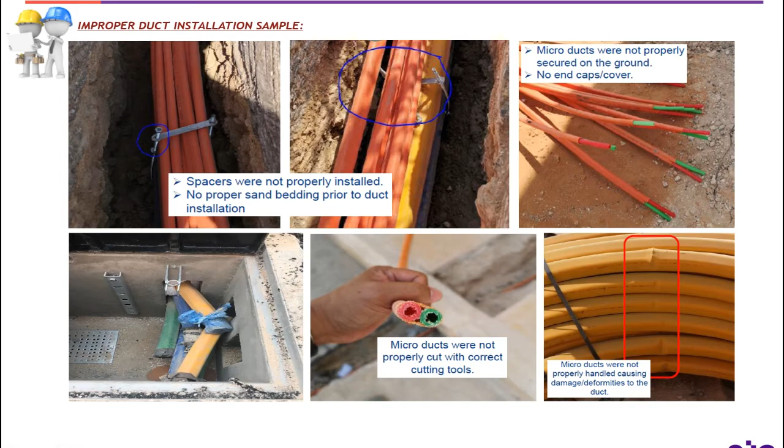So another sample of pictures of improper installation in the field. As you notice, the manhole is not aligned to the trench. Duct spacers were also not properly installed, as you can see in the picture. As per STC standard, duct spacers must be installed 1.5 meters apart.

Plywood was used also to cover the knockout windows instead of grout. The trench is also beyond STC specs, causing the contractor to spend more time on concrete backfilling. There's no sand bedding also, which will pose danger to the ducts and might get punctured later on.

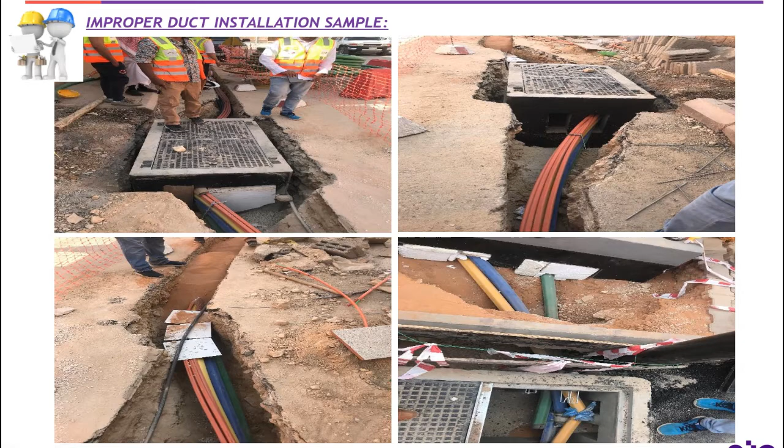Let's move on to backpull or stationary reel method. So when do we need to use this method, guys? Use it on routes where space is limited for heavy equipment. It can also be used in road crossings, trenches with obstacles, and in long distance routes where the soil is not excessively rocky.

Figure 30 is just to show you a stationary reel and where it has to be used. In some cases, ducts can also be pulled by a pickup truck, tractor, backhoe, or similar, taking great care during pulling. Avoid excessive tension and force all the time during pulling.

Polyethylene corrugated duct can be pulled directly into a 40 centimeter wide trench, as shown in figure 31. However, if the trench is 20 centimeters wide, the duct should be deployed alongside the trench and lowered into the trench manually, as shown in figure 32.

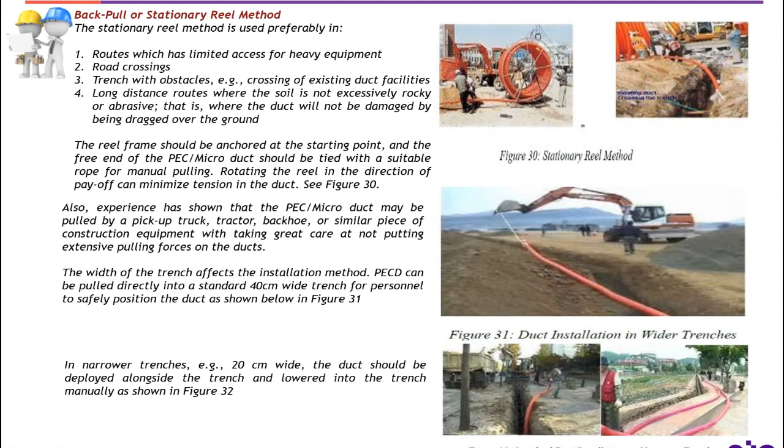So drive off or moving reel method. What do you know about this method, guys? Drive off method is used on routes that can be traversed by reel carrying vehicles. It could also be used outside the cities, in areas with abrasive soil or rocky pavement. As much as possible, the vehicle should be positioned near the open trench to allow easy laying of duct directly to the trench, as shown in figure 33, which shows how a moving reel must be positioned along the trench.

Let's talk about mole plowing method. Who among you guys have tried or experienced this mole plowing method? As you know, this method is very common in long distance networks. This method could only be applied if the pavement is sandy or soft. Otherwise, if it is not, then use another trenching method.

Prior to mole plowing, you guys need to perform proper and correct precautionary measures like ground scanning, test pit if necessary, and coordination with other utilities, municipality, and other agencies involved. By doing this, it might save you from any damages to existing underground utilities during execution. This plowing method can also install multiple ducts, including warning tapes and earthing as required, and close the plowing furrow simultaneously. Is it clear?

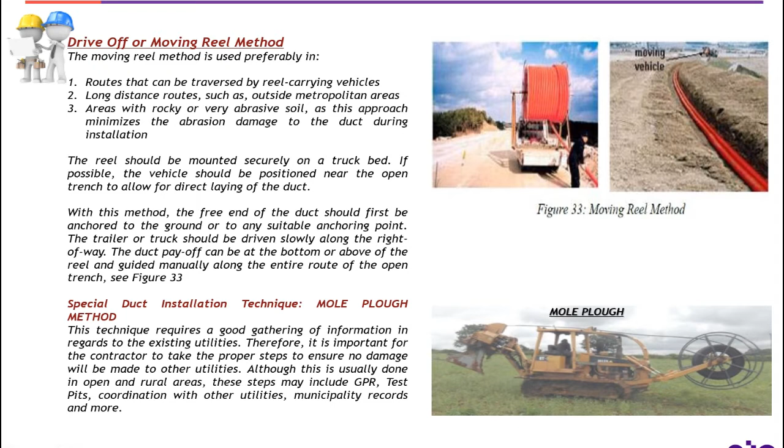So this is the plowing machine on the right side with its itemized parts like the drum mounting, drum brake, guide roller, lifting mechanism, and many more.

The plowing method can be divided into the following working steps. Number one, concerning external lines and soil quality, selection of plowing units and drilling tools, removing of bushes, fences, and hindrances. So you also have reconnaissance of the plow path course, laying out of ducts or installation directly from the transport vehicle. We also have plowing, reconstructing the surfaces, and preparing a scale accurate drawing of the plowing course.

So the mole plow has features to produce vibration on the plow share in vertical direction. This loosens the soil and cuts a clean, narrow duct-laying trench through it. Due to the vibration during digging, fine sand falls to the bottom of the trench and all large debris moves onto the surface, such that the duct is always protected by sand.

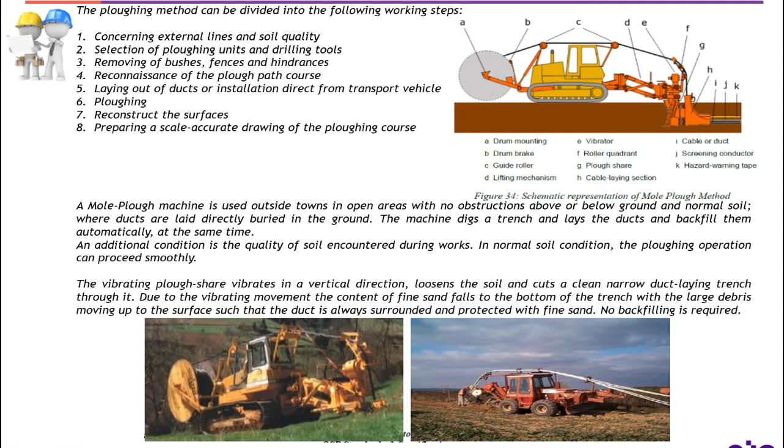Okay, so we move on to the installation of multi-way up to 8-way 110 mm ducts. We also have installation of over 8-way 110 mm ducts, and we will also discuss the installation between mini manhole and handhole, including road crossing.

Installation of multi-way up to 8-way 110 mm ducts and installation of over 8-way 110 mm ducts both don't require concrete encasement. However, as an alternative to using duct spacers, 12 mm steel bars are used, driven into the ground at 1.5 to 2.0 meter intervals along the trench to keep the ducts in correct formation. On completion of the duct nest, 6 mm steel bars should be placed horizontally across the uppermost layer of ducts and tied at 75 meter intervals to the vertical bars.

Okay, so duct installation between mini manholes, including crossings. Shown below is a typical trench route in the secondary network. The stationary method is the preferred method because of the existence of existing utility ducts along the trench, including road crossing, as you can see in the picture in figure 38.

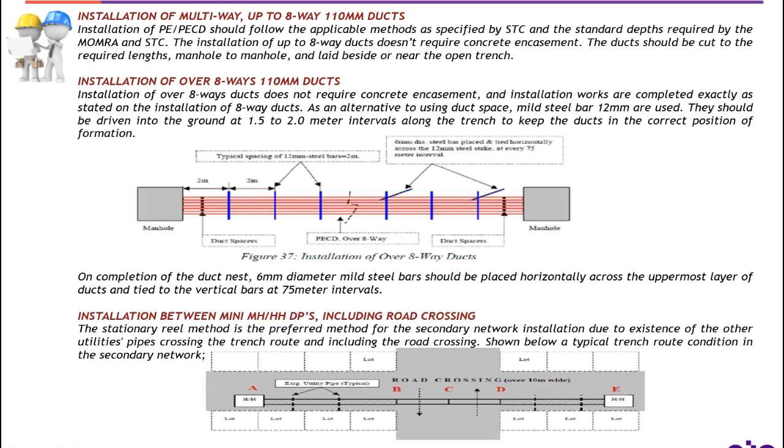This slide will guide you how to install ducts step by step when crossing streets or road crossing. Step one: let's say you want to excavate from point A to E. But before you can complete the trench, there are procedures you need to do. So excavate from point A to point B, shown on the right picture, and also B to C and D to E.

Leave point C to D open for traffic, as shown in figure 39. Use steel plates to provide temporary cover on all private driveways to avoid any inconvenience for the customer. So that's step one.

Step two: position the reel near point C, then pull the polyethylene corrugated duct from point C to A, as shown in figure 39.

Step three: cover the trench from point A to C and leave point B to C open for traffic. Then move the reel to point D, as shown in figure 40.

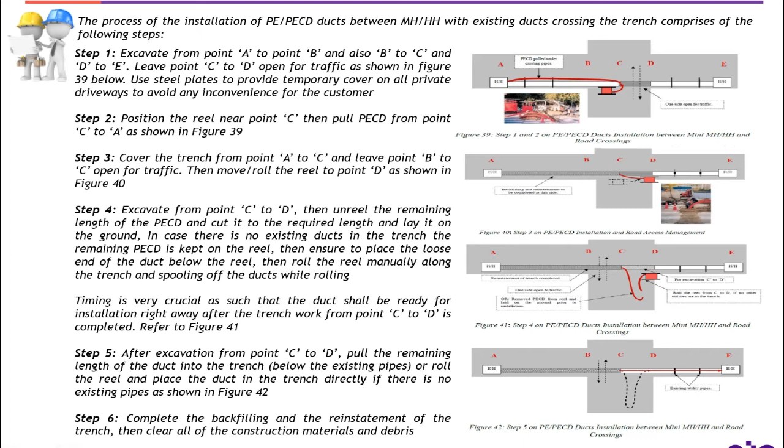Okay, so sealing of ducts. All empty ducts shall be sealed at all times, whether completely installed or not yet installed. This will prevent ducts from water entry, dirt, or foreign objects.

Microducts shall be sealed as well with the prescribed end caps approved by STC. Main ducts installed in mini manhole, handhole, or even in a cable vault or cable chamber should be sealed with foam. So if there is new installation, contractors should not be charging for extra services for the sealing of ducts or even installation of end caps, because these are already included in the new installation.

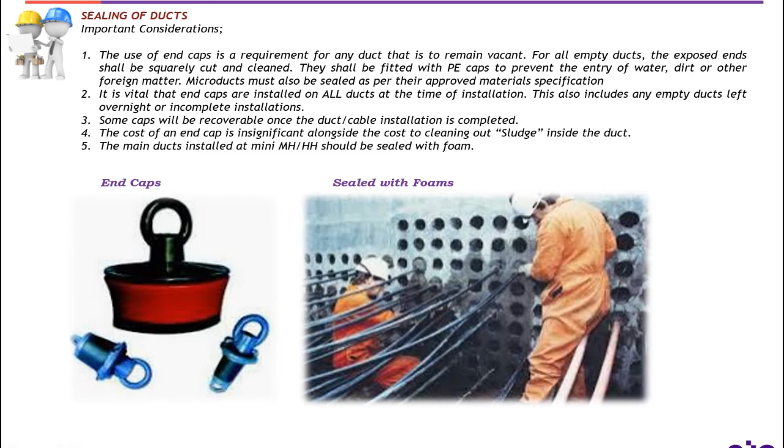Next topic is duct configuration and formation. This slide will tell us about the standard configuration of ducts in the feeder and distribution network.

Between central offices or exchanges towards the access sites, a 20-way by 32 mm duct with a configuration of 5 by 4 is being used, where 5 ducts are orange, another black with orange stripe, and 10 are black pipes, as shown in figure 43.

20-way by 32 mm and 12 bundles of 20 mm could also be fitted in one knockout window of a manhole or handhole, as shown in figure 44. With regards to the drop ducts, a 2 by 20/16 is used to the customer end from the nearest manhole or handhole.

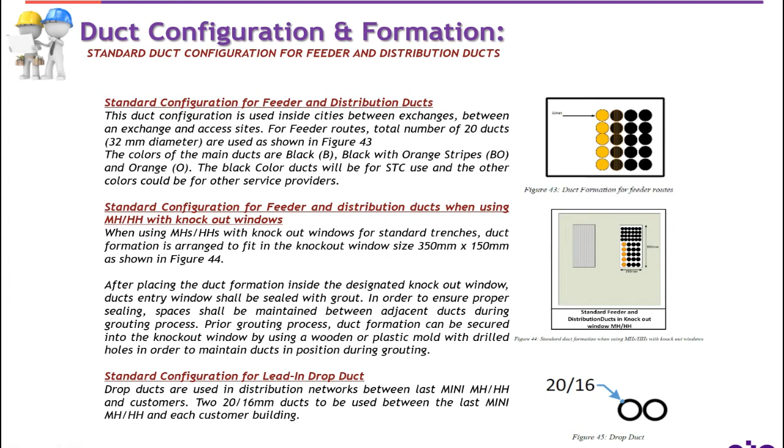In a long-distance network outside cities, towns, and villages, a 110 mm corrugated PE duct with a pre-installed 5 by 32 mm subduct has to be used, as shown in figure 46. Take note: do not receive any material from STC or vendor of this kind if there is no installed copper wire in the duct sheath, because this copper wire will serve as a detector to pinpoint the position of the duct underground later on.

Until this time, microducts in the long-distance network are not yet being implemented, until further notice.

However, in the feeder and distribution network, microducts are used, and most of the application is on the NBB projects. So 7 by 25mm HDPE microducts of 3 bundles is used in both feeder and distribution.

In table 7, you will find the duct color codes for the 7-way microducts, where yellow is duct number 1, blue is duct number 2, green is duct number 3, red is duct 4, gray is duct 5, white is duct 6, and orange is duct number 7.

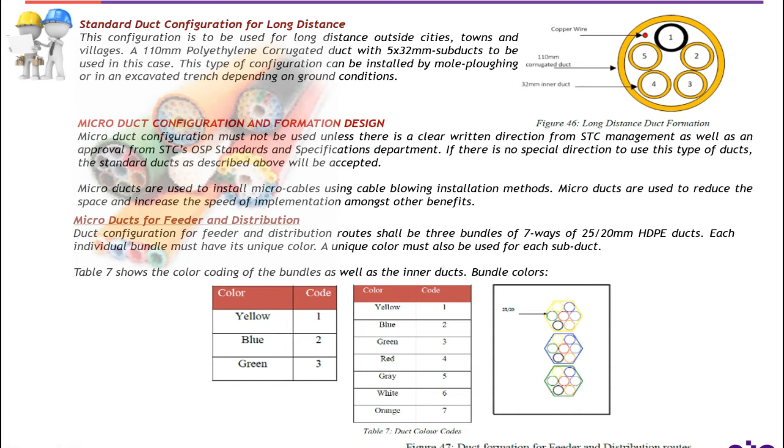So microducts for lead-in. For microdrop without sharing, that configuration would be 1 by 2 of 12/8 HDPE pipe to be installed in villas, buildings, or any other infrastructure from the nearest handhole or manhole.

Color codes in this configuration would be yellow-blue, where yellow is duct number 1 and blue is duct number 2. The only difference of drop ducts with sharing versus without sharing is the duct configuration, where drop ducts with sharing would be a 2 by 2 configuration: yellow is duct number 1, blue is duct number 2, green is duct number 3, and red is duct number 4, as shown in table 9 of this slide.

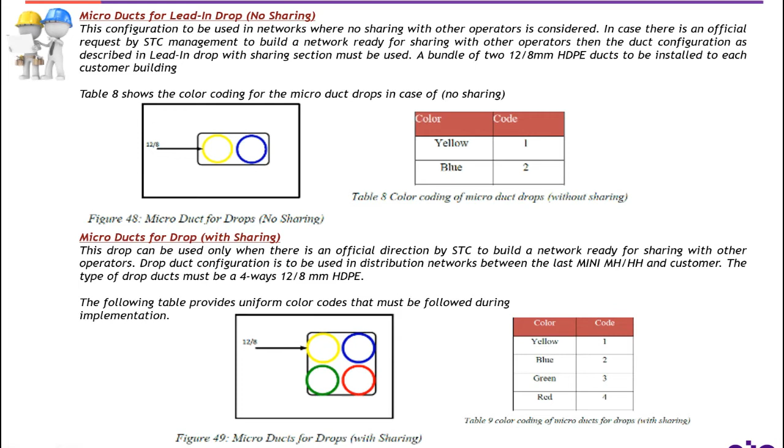In this slide, we're going to discuss the main duct configuration for copper, lead-in drop duct configuration for copper, microduct configuration for long-distance network, and duct bend requirements.

For main duct configuration for copper, this configuration is used between MSAN and copper cabinet, where a combination of 75mm HDPE pipe and 3 bundles of 7-way by 25mm microducts are to be used in a common trench.

For lead-in drop in copper, which is basically used from distribution point to the customer, a combination of 50mm HDPE and a 2-way by 12/8mm microducts are to be used.

So for the microduct in a long distance network outside cities, a 4-way by 25mm HDPE pipe with a metallic wire is to be used.

With regards to the duct bends, we have different situations in table 11, which will guide you regarding the bending requirements.

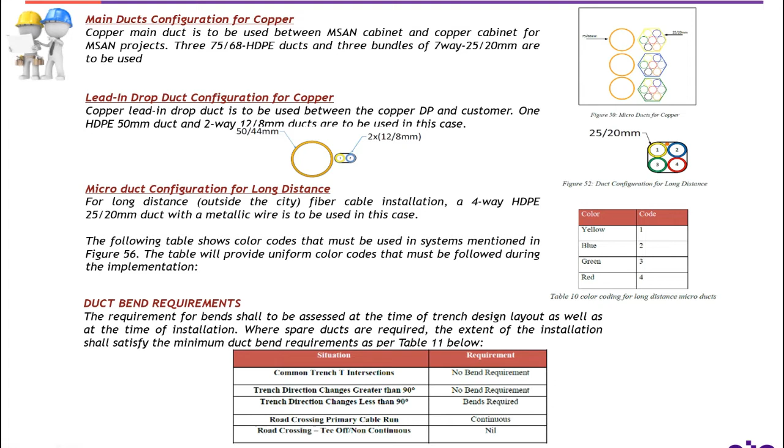Duct or cable location markers. It is very important that when you are implementing underground network in a long distance route, location markers must be in place or available to determine the exact position of the ducts or cables underground.

As per STC requirement, location marker must be installed in manholes, handholes in a long distance route, or rural areas.

If it is a direct buried cable, marker post must be installed every 400 meters. However, if cable is ducted, then you need to install marker post every 250 meters apart.

Also, if there is a change in cable route or direction, like road crossing, river crossing, wadi, and culvert, a marker post with two black stripes is also required.

If there is a splice closure, two marker posts with three red stripes shall be installed in both ends of the handhole, as shown in figure 53.

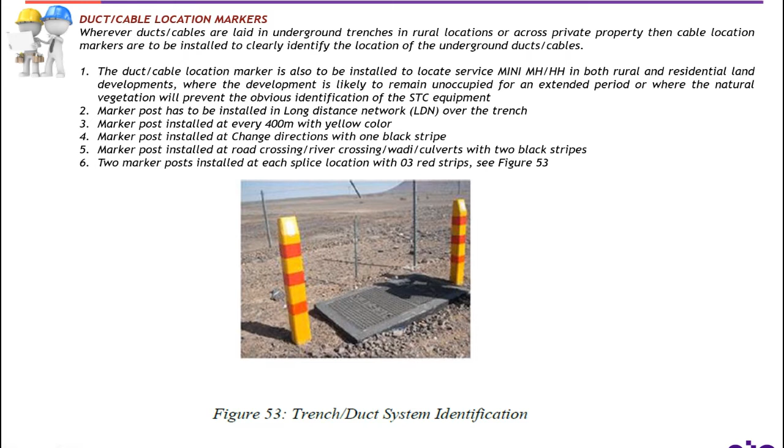So let's move on to the crossing requirements. In a long distance network, you often encounter these situations: crossing river, culverts, bridges, tunnels, or even railroad crossing.

For example, in wadi crossing, take note that during survey, the surveyor must identify clearly if the wadi is dry or just a culvert, or if the wadi is with water, wet, or if it even requires special protection. This is very important during survey because plant units that you are going to apply in these scenarios are totally different.

For dry wadi crossing, meaning that only a small amount of water flows during rainy season, plant units that you should apply will be 1200.025, which is for a supply of 1 by 110 PEC duct with 5 by 32 mm subduct on it, with a concrete encasement. Another PU is 1030.001, which is for extra excavation in soil. And finally, 1035.001, which is for the breaking and removal of rock if it is only required.

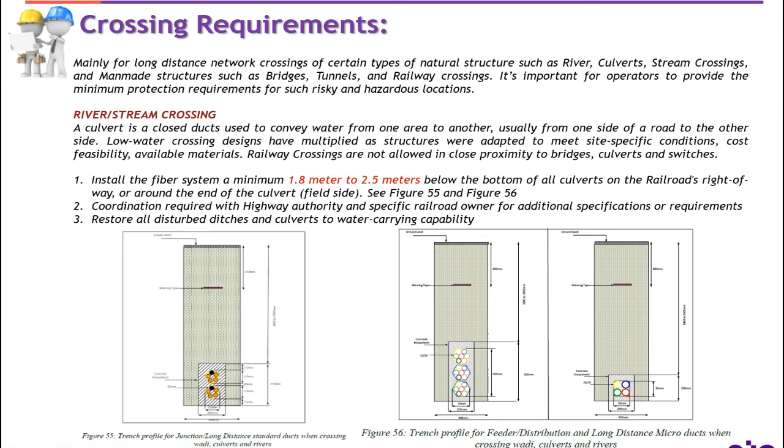So let's move on to bridge crossing. When crossing a bridge, make sure that before you install a new pipe, ensure that there are no more available ducts to use. Always use existing ducts as much as possible. If it is already saturated, then it's time to install a new one.

You guys need to coordinate with proper authorities and acquire the access permit before execution. With all the proper requirements prior to implementation, a 110 mm HDPE, PEC, or free duct shall be used. Where required, ducts shall be encased in concrete where they traverse the bridge supports and enter the ground. The most common method of installation in this case is by the use of a hydraulically operated crane fitted with a safety basket, so safety precautions shall always be observed during execution.

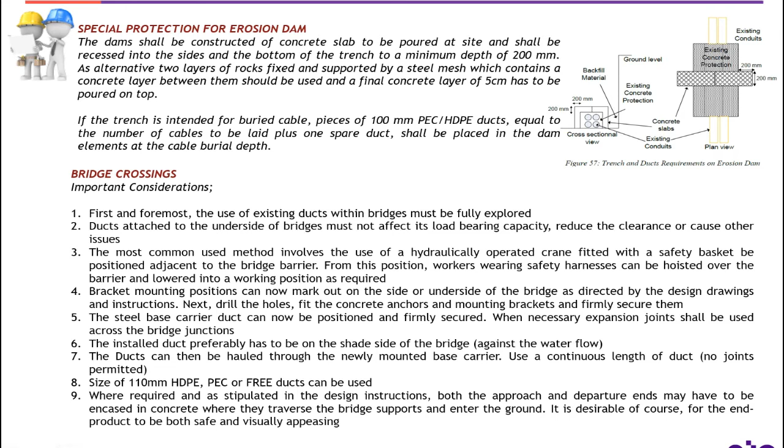Always secure first a permit from respective authorities prior to installation. When crossing a tunnel, always observe that ducts should be installed 3 meters minimum height above the ground. Where there is less than or equal to 600-volt electric lines, a 300 mm separation shall be observed. If the electric power is more than 600 volts, then you need to install the ducts on the opposite side of the tunnel.

So what about railway crossings? Always secure approval from the proper authorities because there are certain requirements and easements within railway boundaries or corridors. With all requirements being satisfied, make sure that the design and duct installation when crossing conforms with the railway load. The telecom duct should be installed 1.8 to 2.5 meters in depth under any railway line. Thrust boring method is the most recommended technique in this kind of scenario.

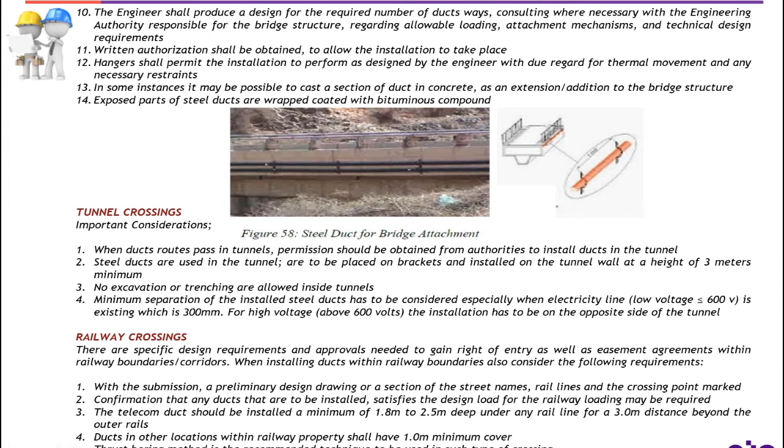Now the topic will be discussed, which is tests on microducts. Air blowing test.

This test is normally performed on individual microducts to detect air leakage in that microduct. Normally, one end of the microduct connects to the air feed compressor through the duct calibrating equipment, while the other end is sealed or closed using an end plug.

Now compressed air will be fed into the microduct with pressure raised to 5.5 kg per centimeter square, and the inlet valve closed. Wait for 10 minutes. If the pressure does not drop below 5 kg per centimeter square in that time, the pressure test is passed, meaning a pressure drop of 0.5 bar is permissible.

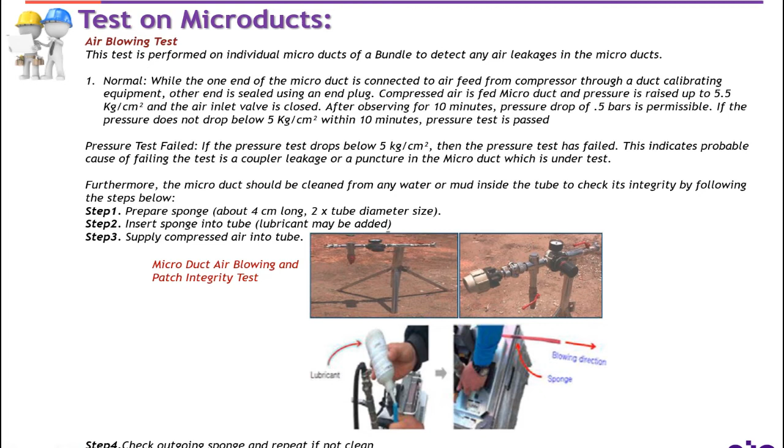Mandrel test, or ball pass test. There are a number of steps to follow for this test. Step 1: prepare a ball of steel or plastic which has to be 85% of the inner tube diameter. Step 2: insert the ball in the tube and then supply compressed air into that particular tube as well.

Step 3: a metal mandrel is recommended for main ducts, whereas a wooden mandrel is also acceptable for subducts to be regularly checked. Step 4: for main ducts and subducts, mandrels with a diameter of approximately 90% of the inner diameter of the duct shall be used.

Step 5: all mandrel tests shall be carried out in the presence of an STC inspector and shall be properly documented. Availability of the following resources should be ensured before proceeding for DIT, or duct integrity test, of a new stretch where two ducts are to be used or tested.

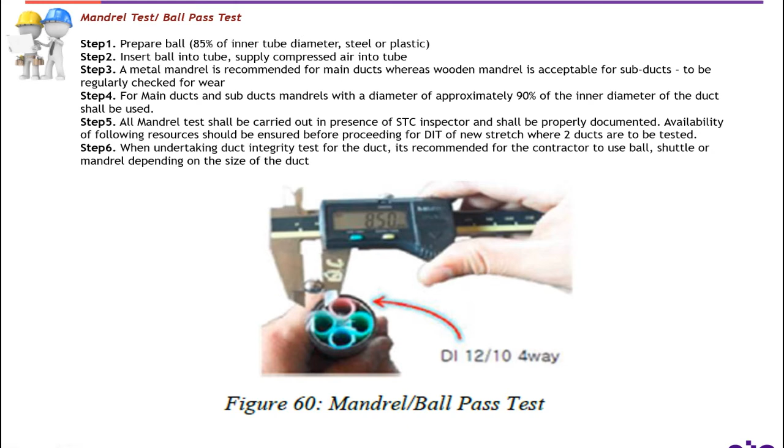Step 6: when undertaking the duct integrity test for the duct, it's recommended for the contractor to use a ball, shuttle, or mandrel depending on the size of the duct. Duct integrity test: the contractor must submit a DIT test report upon completing the DIT test.

The tools and equipment to be used are: 3 walkie-talkies along with 3 chargers, 3 PTE along with fittings including hoses, 4 transmitters and 4 housings, 1 receiver, 8 shuttles, 4 end couplers, 1 vehicle on rent at site.

28 end plugs, 14 push fit couplers, 2 brushes, arrangement for getting 2 outlets for the compressor for 2 PTE and 1 release valve, 1 compressor along with tractor on rent at site, 2 catchers, flexible wire grip, and a sponge of 1 by 1 meter dimension.

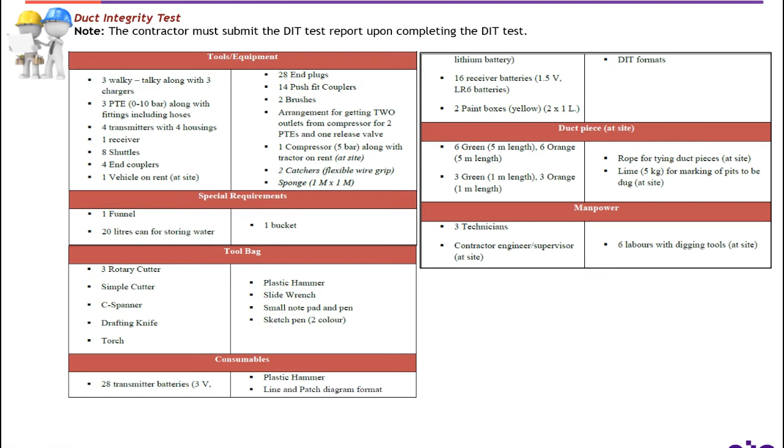Now the topic to be discussed is backfilling. Consolidation compaction is mandatory in order to maintain the density of the soil and ensure the smoothness of the surface reinstatement. Now we have some general requirements.

Number 1: the contractor shall carry out backfilling of trenches and other associated excavation immediately after the ducts are installed, to avoid disturbance to the area by keeping an open trench. If any trench cannot be backfilled at the end of the day, the contractor shall consider security provisions to ensure ducts are not vandalized and that the open trench is not a safety hazard.

Number 2: before commencing the backfilling, all foreign material, free water, and slurry shall be removed from the trench.

Number 3. Backfill material shall not be placed in excavation containing free water or slurry. Excavated material from the trench may be permitted as backfill above the bedding sand if this material is predominantly soil.

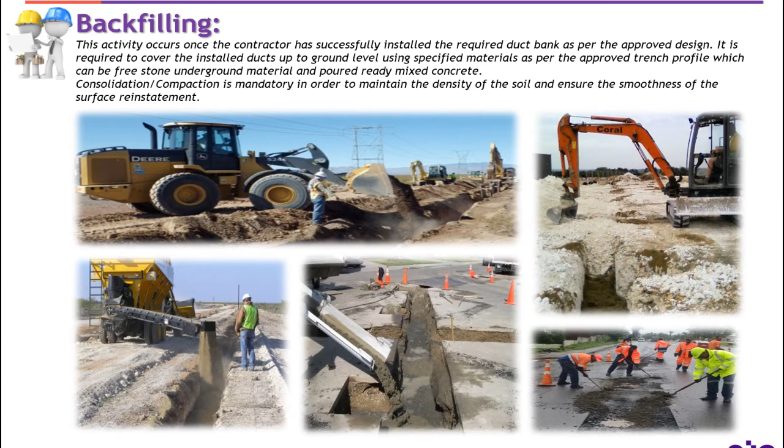Compaction. Compaction is an important element to perform after the backfill. There are a number of checkpoints to be followed.

Number 1. Proper compaction of the embedment zone is important for limiting the deflection of the raceway. After compaction, the soil should completely encase the raceway, providing support around the diameter and along the length of the raceway. The soil should be consolidated and free of voids. The density of the soil after compaction is specified by the project engineer and is typically in the range of 85 to 95% Proctor density.

Number 2. Compaction of the final backfill material is not critical for raceway performance but is important for providing a stable foundation for structures that may be built over the trench.

Number 3. The type of compaction method chosen depends on the type of backfill material used. For coarse-grained, non-cohesive soils such as crushed stone, pea gravel, and sand, vibratory compactors work well. Static compaction devices, which utilize their own weight to compact the soil, can also be used on non-cohesive soils. For cohesive soils such as finer grain clays, impacting compactors are the most effective devices.

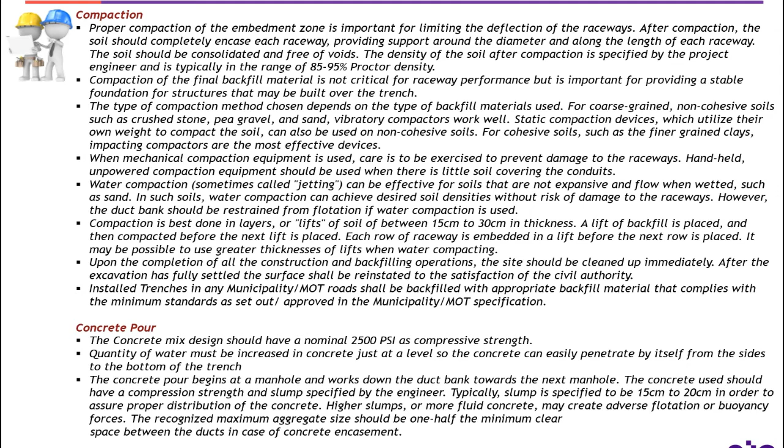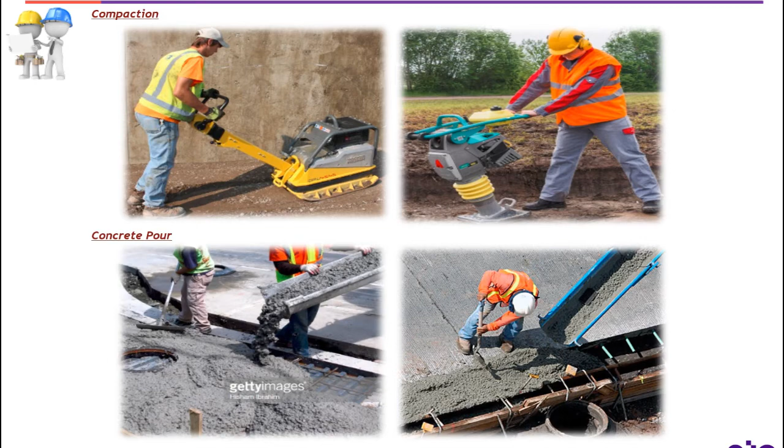Now we will talk about surface reinstatement. Surface reinstatements for any surface breaking related to trenching or excavation within the OSP civil works, the surface has to be reinstated to its original condition. The surface reinstatement covers all types of surface such as tiles, paved, concrete and asphalt, etc.

There are some general requirements for surface reinstatement. Number 1: Any constructed footway must be reinstated with the same surfacing material that existed originally, for example concrete blocks, slab, etc. Material may be reused if undamaged or else replaced with similar material.

Number 2: After finishing the work, all the equipment, warning signs, barricades, etc. shall be removed from the site immediately. Number 3: All debris shall be removed from the site to an approved designated area. Number 4: The site shall be restored to the condition in which it was found previously, as a minimum.

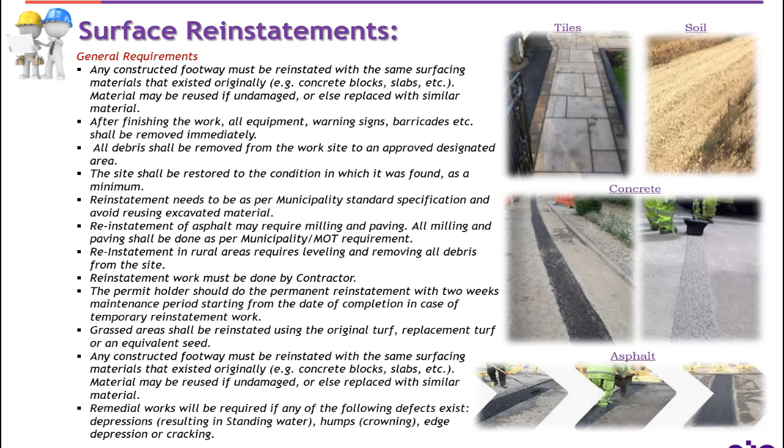Reinstatement of asphalt and paved surface. There are a number of checkpoints. Number 1: The asphalt work shall be according to rules and regulations given by MOMRA and MOT specification. MOMRA means Ministry of Municipality and Rural Affairs. MOT means Ministry of Transport.

Number 2: Reinstatement of asphalt and surface to existing standards with necessary tests as required by the relevant specifications, unless otherwise stated. Reinstatement shall be to that of the standard width specified for the associated class of roadway, including any bonding.

Number 3: Prior to asphalt laying, the edges of the old asphalt shall be recut 15 cm each side to expose a fresh clean surface, in class A only. Number 4: Removal and reinstatement of sub-base dimension, width and depth for class A, B and C will be according to the MOMRA and MOT specifications.

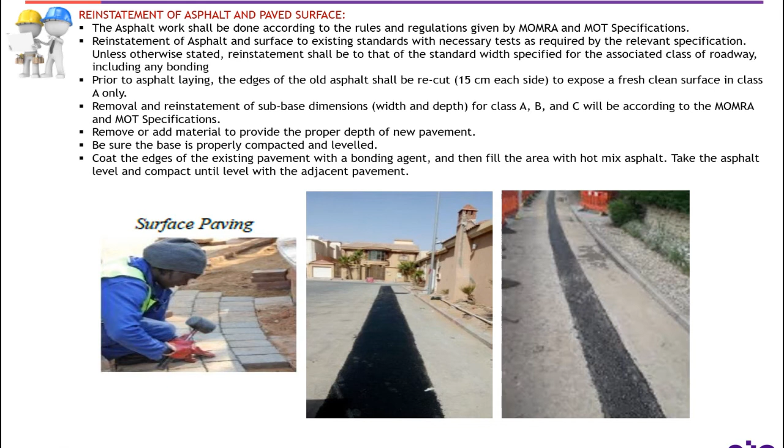Reinstatement of sidewalks. Number 1: In the case of tiled footway, reinstatement shall be not less than the trench dimension specified, and shall additionally be to a whole number of width nearest applicable to the standard width for reinstatement. Breakage outside of this dimension shall be the contractor's cost and responsibility. Number 2: Paved tiled surfaces and footpath pedestrian areas shall be restored upon reinstated subbase as it was found before the work, unless directed otherwise by the STC supervisor.

Number 3: Reinstatement of concrete surface for special types such as marble, granite and ceramic will be in accordance to the original surface status required specifications. Number 4: Broken tiled or damaged tiled footpath pedestrian areas shall be replaced whenever necessary.